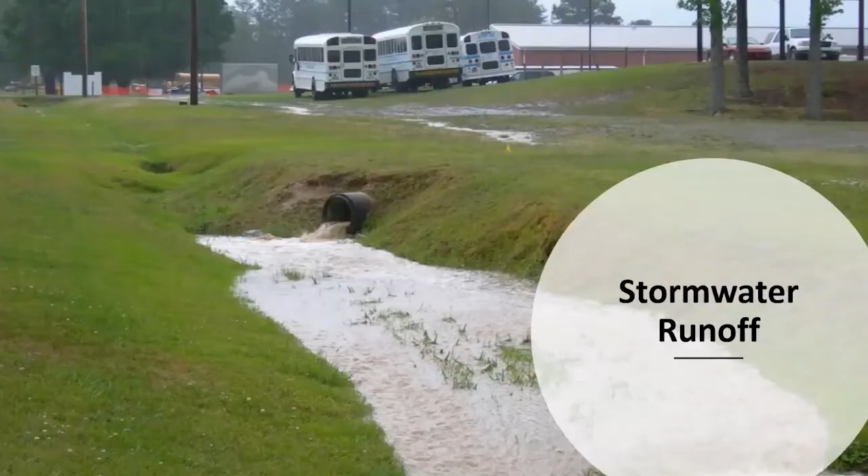So you're going to hear me mention the word stormwater runoff a lot, and I just want to make it clear what I'm talking about. This is runoff generated mostly from impervious surfaces. Those could be roofs or parking lots or roads, then running off and generally entering into a stormwater inlet or pipe, as you can see here.

And generally that water, by the time it gets into that pipe and into a creek, takes on this chocolate milk look, and a lot of times that's the sediment it's carrying. I want to emphasize that the more impervious cover in an area, the more stormwater runoff you'll have, and the more constituents are in that stormwater.

Conversely, when you compare that to an area that's highly developed with a lot more impervious cover, the amount of water infiltrating is greatly reduced and the runoff is greatly increased. That runoff is what contains this non-point source pollution like sediments, bacteria, and metals, which is the main concern.

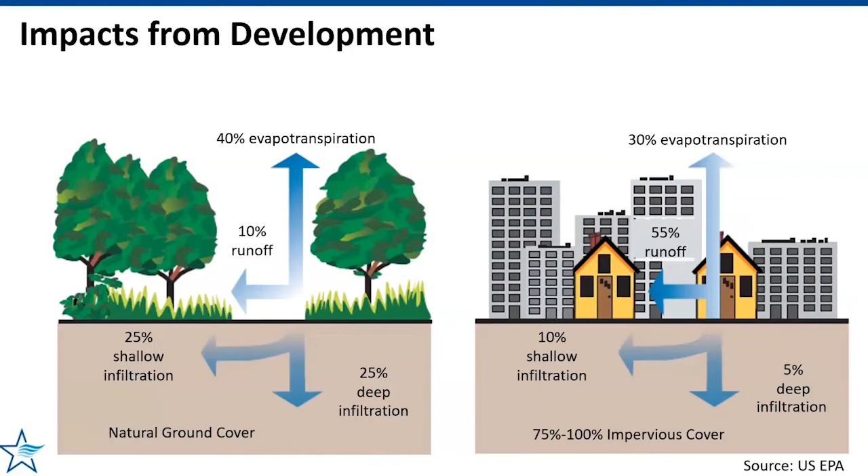We also have a huge impact of trash. The River Authority collects tons every year. This isn't so much an issue other than people causing it, but it's a large detriment to the river. Then we have pollutants such as metals, oils, and grease, often greatly attributed to the transportation systems of roads and highways, all entering into the river.

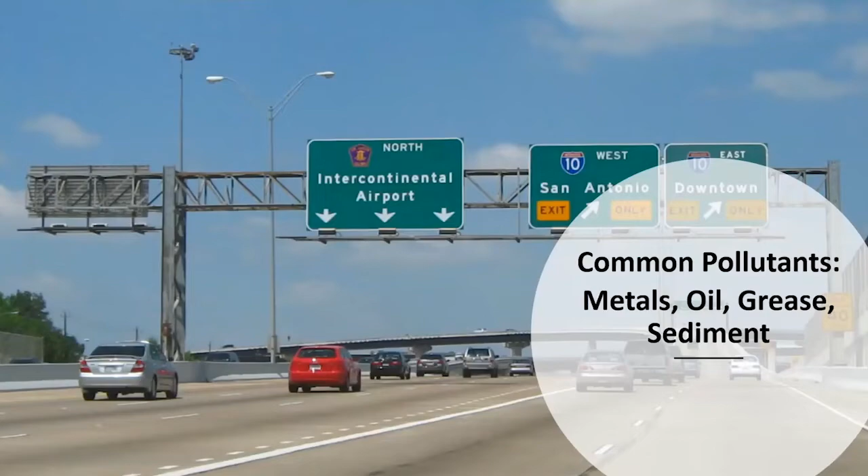And then sediment. Sediment is one of the largest problems here, and it comes from all sorts of different sources, from construction sites not having up protective fencing, to erosion, and on and on.

And then for us, bacteria. Bacteria is a very tricky constituent to treat, in that wherever there's human or animal activity, you're going to have bacteria, and it can grow exponentially. So even though you may treat a little bit, it can still grow exponentially once it reaches a water source. It's very difficult to treat, and it's the cause for most of the impairment for the segments in our watershed.

So I want to really cover what is low-impact development. When I talk about low-impact development, I'm talking about the overarching treatment of development - not just the actual methods, but the overall method of designing things. You're looking at the area holistically and saying, if I'm going to develop a greenfield site, I want to look at the slopes, and I want to protect certain areas.

I want to attempt to minimize the amount of impervious cover that I'm adding. All of these design principles are key to what low-impact development is. So low-impact development is not the actual method itself, it's this overall design philosophy.

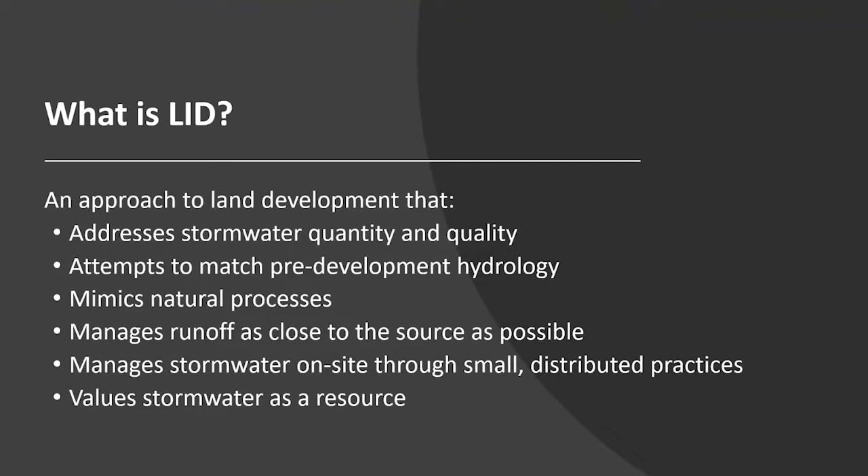It also mimics natural processes such as evapotranspiration and infiltration. One of the key concepts is treating the runoff as close to the source as possible, not letting it get into large volumes that are difficult to treat. All of those combine into having on-site, small distributed practices to do the treatment - overall treating stormwater as a resource instead of just stormwater that needs to be put into a pipe and sent to the nearest creek.

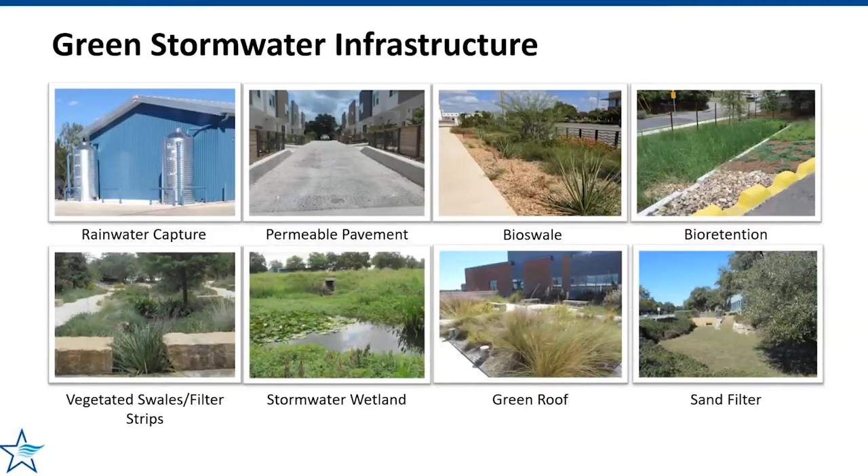Then we look at green stormwater infrastructure, which are the actual methods to implement the treatment. Our manual, which the city has adopted, has approximately 11 of these different methods. I'm showing 8 here, but in our experience, four of these really account for about 85 to 95% of the treatment that we do locally: rainwater capture, permeable pavement, bioswales, and bioretention.

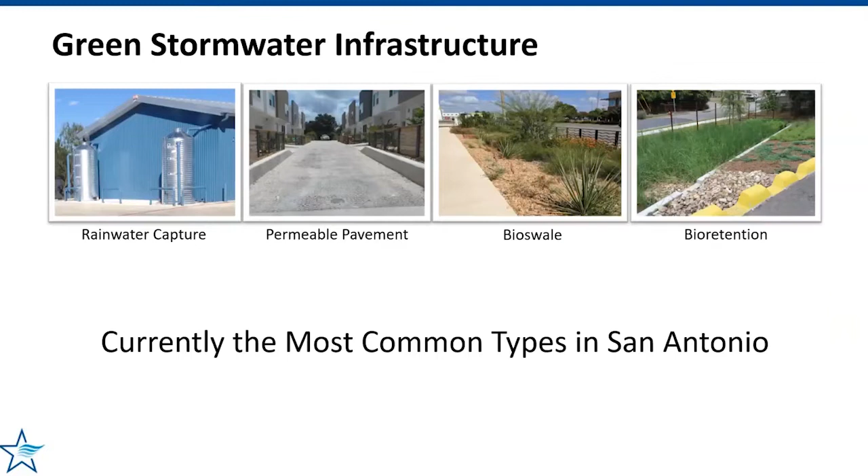Bioswales and bioretention are very similar to each other. The only difference is that bioswales are generally more longitudinal - they're longer and have a slight slope, so they can convey water a bit differently. You may also know bioswales or bioretention by the common term rain gardens. There's a slight distinction between the two in that bioretention generally uses a specialized soil, and oftentimes will have an underdrain - it's a more engineered and designed system.

Getting into a bit more detail on each of these, here's an example of rainwater capture using a cistern, capturing stormwater from a roof. I want to point out that for our purposes, we do not allow any type of potable water backup for cisterns, meaning these cisterns cannot be filled with common tap water for any reason.

One thing we've noticed is that oftentimes if these are filled with tap water, they never drain down. So one of the main ideas is that when a rain event happens, these should be empty.

We collect the stormwater after a rain event and then slowly drain it off over a 48-hour period. Oftentimes when they have a potable water backup system, that system fails and they end up being full all the time.

Here's an example of permeable pavement. The key concept here is that the top layer of pavers has space between each paver that stormwater can seep through and enter the layers below.

It often goes through a bedding layer, a sand filter layer, and enters a drainage layer of a lot of void space rock below, where it is held for a little while, and once it collects there, it can be carried off by the underdrain to a stormwater network.

These systems provide a lot of holding capacity, and research shows that not all the stormwater that enters through the top exits through the underdrain.

Some stormwater is held in areas such as capillary action and treated in the biofilms that form in that area.

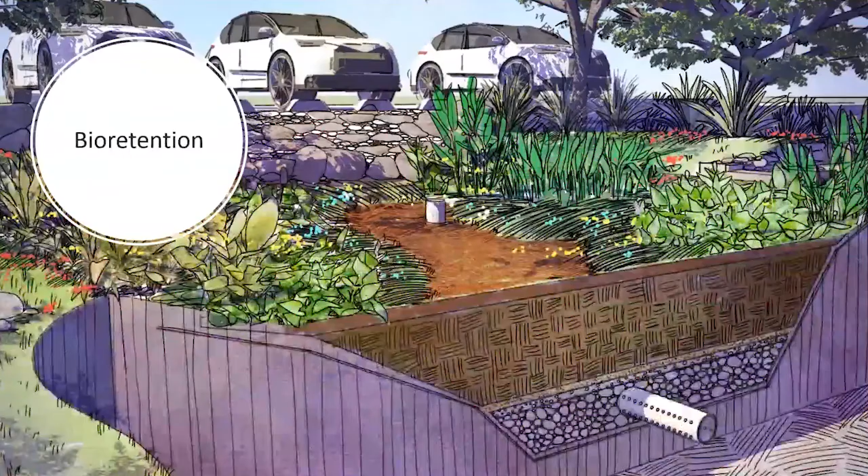Here's an example of bioretention. In this example, we show a parking lot in the background where stormwater is entering through curb cuts, through an erosion control area, and into this lower basin that is covered with mulch and plants.

Then it infiltrates through a special bioretention soil mix, through a choker layer, and into a rock drainage layer below, where it can be collected and put into an underdrain, which can then daylight to another part of the site, or connect to a stormwater network.

Oftentimes, bioretention areas may require liners, and those liners may cover the sides and bottom, depending on different characteristics.

For example, if you have a bioretention area near a building or hardscape within 10 feet, you will want to definitely have lateral liners. And if you're in an area where the soil below it does not infiltrate well, you may want to line the bottom, or if you're over a recharge zone, you may want to line the bottom.

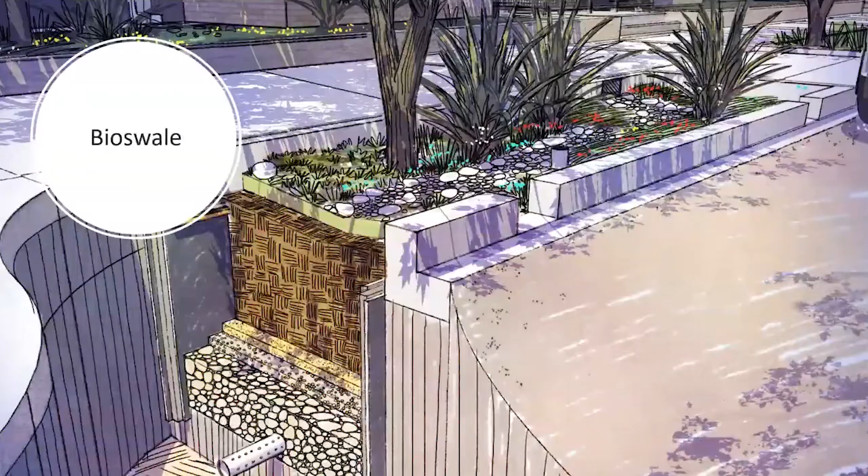The next example here is a bioswale, and this is a very distinct bioswale in a right-of-way, like right on the edge of a road, what some people would refer to as a parkway. So it's a very confined bioswale.

You can see the liner here on the sides. We show a PVC liner with geotextile on each side.

It has the same layers as bioretention, with a mulch layer on top, a bioretention soil layer, a choker layer, and a drainage layer below with an underdrain.

These are very adaptable systems, and this is in a very urban setting, but you can have bioswales in not so urban settings where they're not as constricted.

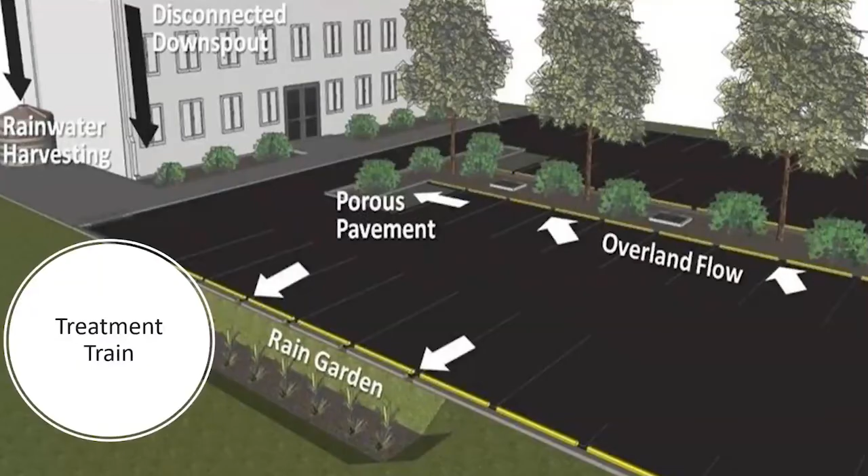I also want to introduce the concept of a treatment train, and really what we're showing here is different treatments on your site. For example, the roof in this example is being treated by rainwater harvesting, and some of it is going to a disconnected downspout to a planted area.

What I want to emphasize from what we've learned going through this process for the last 5 years is that it really requires a framework. And what I mean by a framework is it's not just that we have a design manual.

We also have city code that specifies that that manual is to be used.

The city code defines what low impact development is and the amount of treatment required to be called low impact development.

We also have city and county codes that require inspection after construction of these features and also annual inspections of these features.

So all these things together are what make a successful low impact development green stormwater infrastructure model work. Just having one or two is not enough.

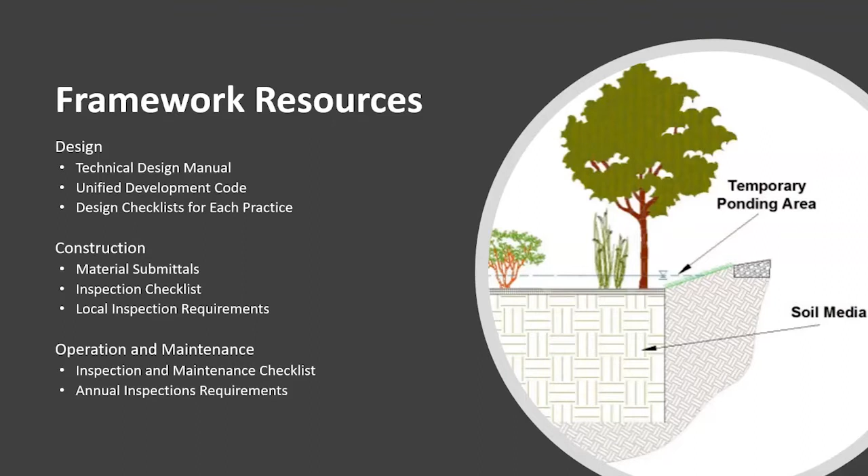You really have to have complete buy-in, from the definition and the code, to requirements by the city. And I'll get into these in a little bit more detail.

This is a picture of what our technical design manual looks like, and there's a link to it. It's published online as a PDF, and it really describes all the different methods of treatment.

It starts off from the beginning on how to do site analysis -- the full low impact development design process of evaluating your site, looking for areas that you might want to protect, and looking for areas that might infiltrate better based on soils.

And then it goes through and asks you, as the designer, what constituents are you most concerned about? Are you looking to treat bacteria?

If so, these are the recommended methods. And then you go on further through a design step-by-step for that method.

I would really encourage everyone to take a look at this manual. It is a very large manual and can be a little intimidating. Some portions of the appendix, where you go through the design iteration process, are some of the most informative portions of the manual.

Here's some examples of what's in the manual. This is an iterative design process for bioretention. It goes step by step on how to size it, and on different elements of the design you may want to include. There are also plans and sections in the manual as examples.

Later on, I'm also going to give you a link to LID resources, where we have sample construction documents for each of the methods.

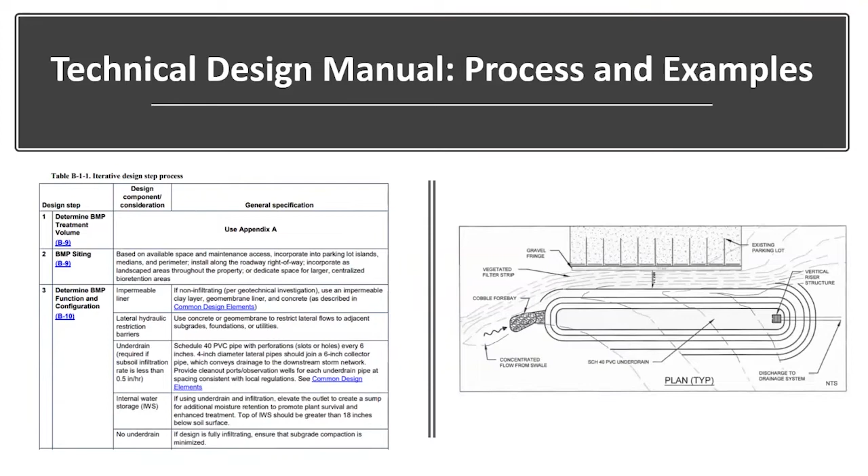The design manual also has specifications for materials. What we're showing on the left here is the specification for bioretention soil. It's important to have these specifications in your manual, maybe as a spec sheet, because this is what contractors need to obtain and test to make sure what they are building matches your specs.

We also have details for connections of liners and different material suppliers locally that you can obtain them from. The River Authority itself does not recommend any contractor or material supplier, but we do supply lists of people that we work with, without recommendations.

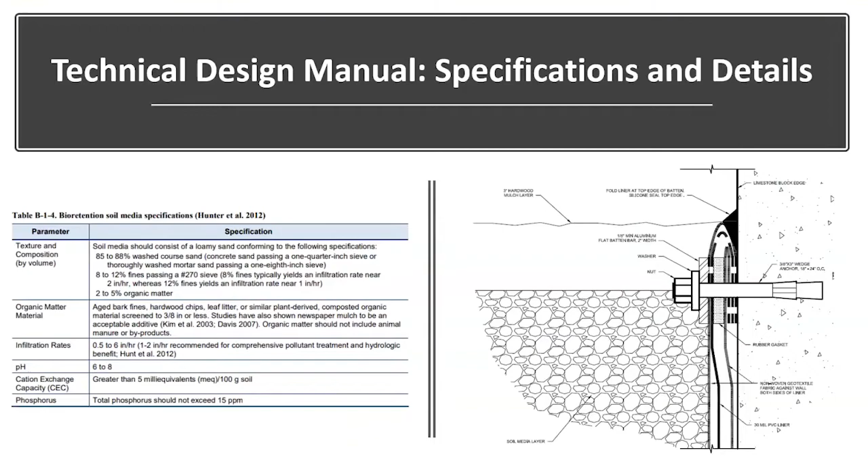Most importantly, I refer to the Unified Development Code. This is really the requirements for San Antonio that define what low impact development is. This portion of the code, with a link below, specifies the treatment quantity, the water quality volume. It defines what it is and states that it's based on the 90th percentile storm.

This is really looking at historic rainfall data for San Antonio using an EPA method. The 1.5-inch 24-hour storm is determined such that 90% of the volume that falls in San Antonio happens in 1.5-inch design storms or less. So if I can treat a 1.5-inch storm, I am treating 90% of the volume that falls every year, which is a strong thing to do.

This also shows that if you follow the standards in the manual, you are presumed to meet the following treatment levels: removal of 80% of the TSS and 60% of the bacterial load. Those are important because it's specifying the water quality volume as being treated and detained, but also specifying what's being removed.

There is an option in the code to use proprietary devices, and it goes on to state that those devices must meet the volume detention requirements and these removal requirements for volume.

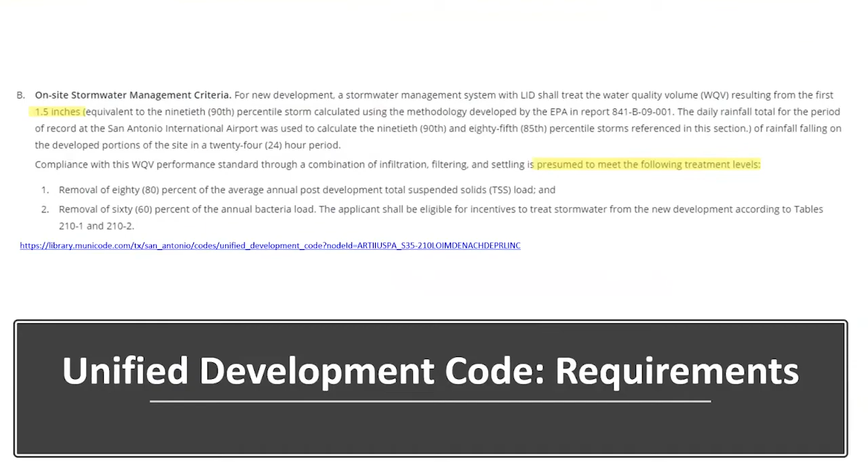Going through and doing evaluation of rebates—the reason we're doing rebates is that low impact development, or green stormwater infrastructure, is completely voluntary in San Antonio and Bexar County, except for a very small area right next to the river in a couple of the Rio districts. In all other areas it is completely voluntary, so the River Authority is trying to incentivize its use, and we go through and provide these rebates, but we get a lot of applications.

One thing I have is a checklist of all the information necessary on the plan set for me to evaluate a design. I provide this as a good example so I can compare design to design. This includes things like contours, catchment areas, soil groups, and BMP drawings, sketches, and sections, so I am clear the designer understands how they're calculating their treatment and what method they're using.

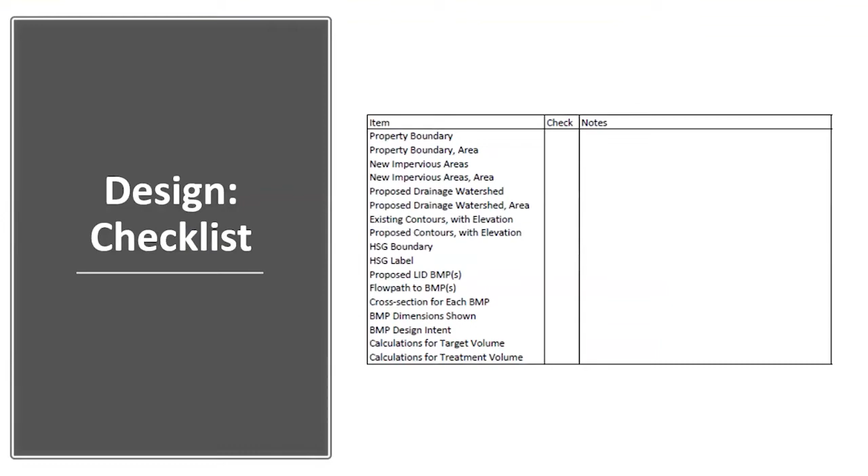We also want to make sure material submittals are carefully scrutinized. We have a requirement for the bioretention soil to submit test results at least a month ahead of time.

And then once the soil is delivered, we go in person and get a sample and have it tested. Too many times I have gone out and found soil that was delivered that I do not believe was the same soil that was initially submitted with test results.

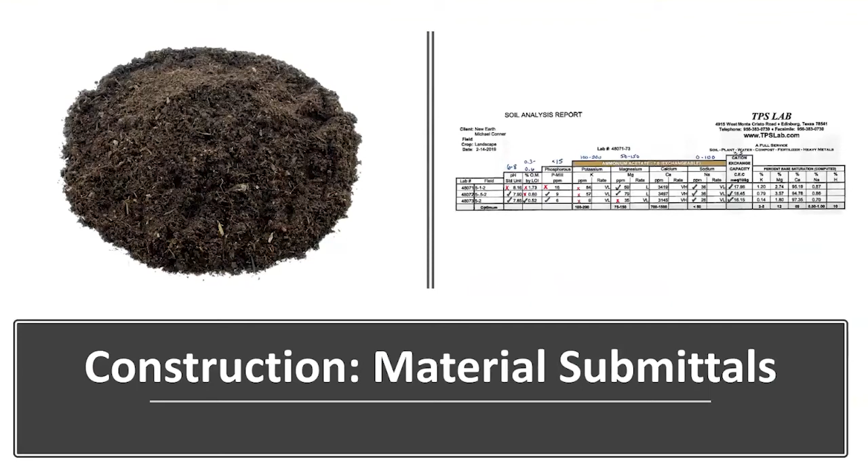What happens a lot of times is you may get a soil that doesn't meet the specifications, and it's difficult in some cases to meet the specifications for phosphorus. You end up having a bioretention area that, as water flows through it, is really leaching phosphorus instead of capturing and holding it. So it's actually doing more harm than good.

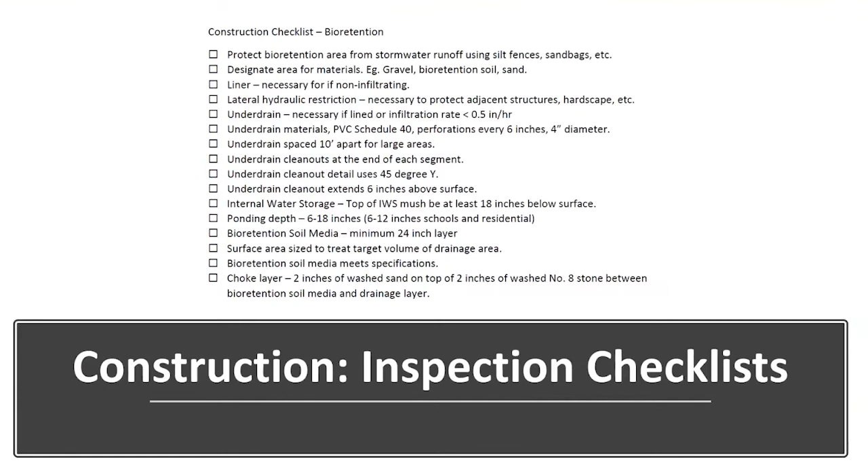We also have construction inspection checklists. As a BMP, a best management practice or method is being constructed, we go out and inspect at certain times. We want to see under drains, we want to see materials, check if materials are completely washed, make sure they have stormwater protection up during construction, and that they're building it correctly, not compacting the soil. It's very important to have these inspection checklists.

We've also learned that operation and maintenance is a very important part of low impact development, green stormwater infrastructure. These methods, once completed and in the cycle of being used, cannot be maintained by just a normal group with weed whackers and a blower. Oftentimes it takes special knowledge, and we do provide training to maintenance staff.

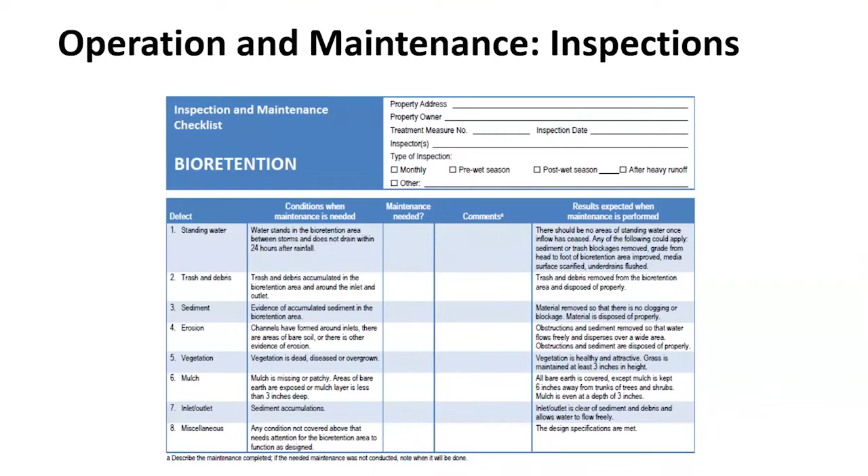Now I'm going to get into some specific examples from projects that are either rebate projects or projects built next to the river where we had a private contract with the developer to do stormwater treatment. None of these pictures are from school grants, but we also have a school grant program where we do smaller projects at schools.

This would have to be scraped off and dug down a little bit, with new mulch and possibly new soil brought in. Then we'd have to verify that it's infiltrating at the proper rate. This could have been easily addressed just by putting sandbags at the beginning of the curb cuts, or by covering the whole area with a geotextile until the rest of construction was complete.

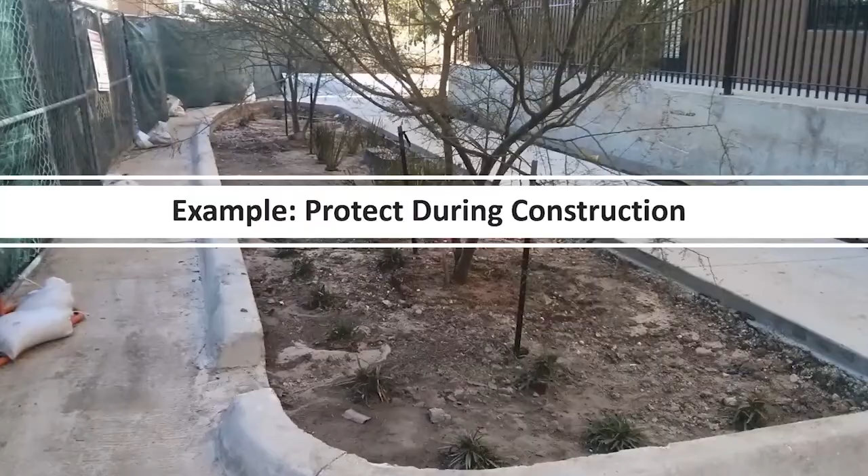Another important thing to look for are spot elevations in your design plans. It's very easy for people to assume that gutters are going to flow correctly, but we see examples here where we have a curb cut and the stormwater is entering this picture from behind me, intended to flow down here, enter the curb cut, and into the bioretention area.

This portion of the curb cut I often like to see sloped down with a 2-inch drop before it hits the erosion stones. But in this case, the actual flow line continues along the gutter and goes straight into a drain, so most of the stormwater bypasses the curb cut completely. I also want to point out in this bioretention area, I'd like to see a larger drop off here with more room for ponding.

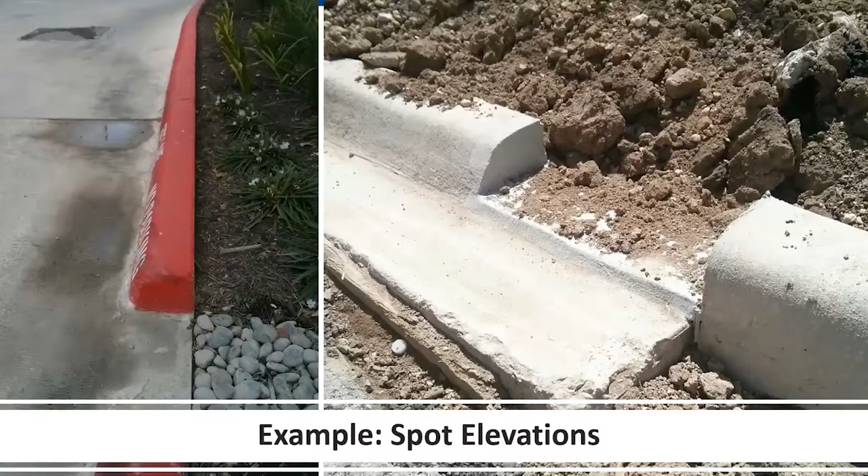When it comes to these features, the small details are very important. When the water does not enter the BMP or the feature correctly, it never gets treated. Other small details related to drains can also be affected here, and I'll show an example of that coming up.

So this is just one of the things we always look for, is to make sure that the basin is built correctly and the overflow drains are at the correct elevation. That volume that is stored above the overflow is volume that eventually infiltrates and is treated. So it's part of the calculated treatment volume, and without it, you're not getting the amount of treatment that is specified.

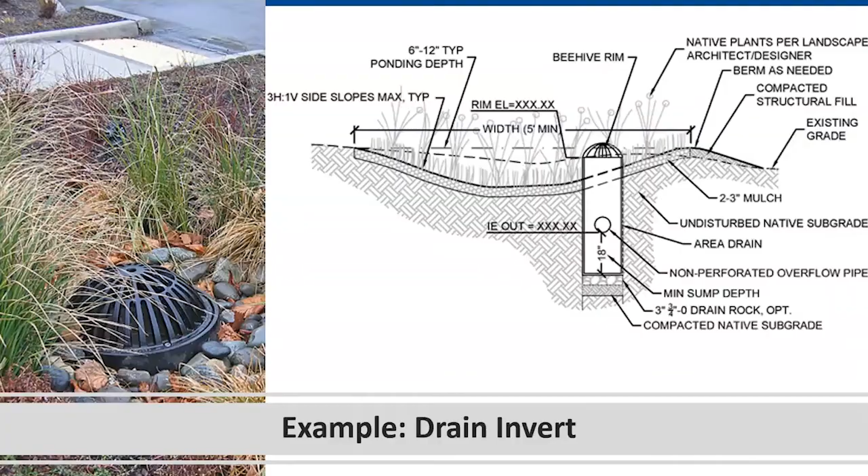Another good example that we see lacking a little bit is coordination. Generally, this is coordination between the landscape architect and the engineer. Oftentimes, the landscape architect's plans do not incorporate drainage portions from the civil engineer's plans, and vice versa. The civil engineer's plans don't include landscape amenities.

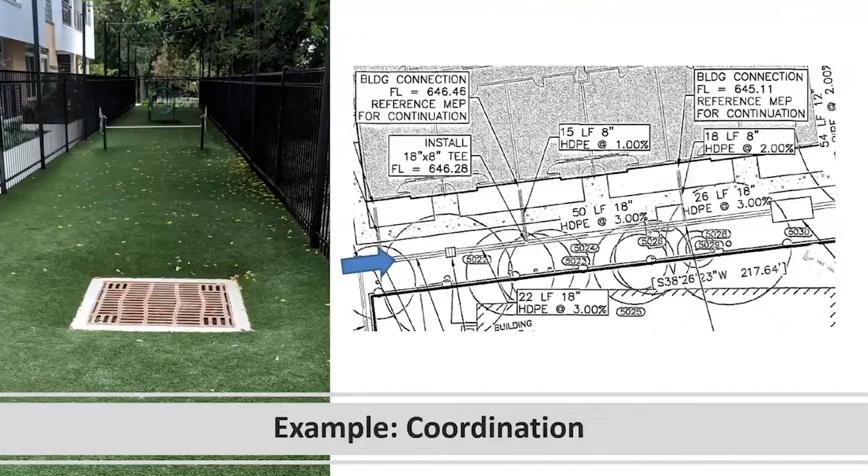In this example, this is another apartment building right next to the river, and when we reviewed the plans, on the landscape plan, we saw a dog park, but we did not see a drainage system in the middle of the dog park. And on the civil plans, we saw the drain, but we did not see a dog park around it. So when it was reviewed, it was not caught until they actually built it. Right in the middle of the dog park is a drain inlet that drains right to the river. We have since then gone back in and required the builder to install an inline filter to handle this. But coordination is the main reason why this happened, or lack of coordination.

Also, excavation is an important point to look at. It's very easy on these design drawings to draw a vertical wall to be excavated and filled back in with drainage layers and soil layers. In real life, it's a little bit more difficult to construct and dig that vertical wall. We oftentimes will recommend that maybe they lay back the excavation a little bit at a slope because it's easier to dig that way, and then build it back maybe with a vertical wall.

At least what I always recommend is to have all the materials on site before you start digging, so that as soon as you dig the trench to the proper depth, you can start building back the layers the same day. In examples where this didn't happen, the contractor digs one day, may decide that he's not going to work on the trench for another week, and inevitably it rains during that time. And it's not just a regular 1-inch rain, it's a 5-inch rain, and the whole walls collapse in, and they end up having to go back and dig it back out. This happened on this project.

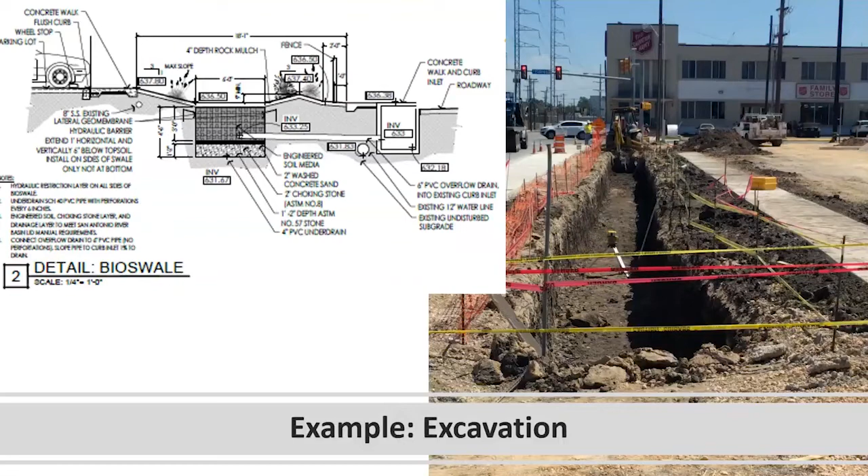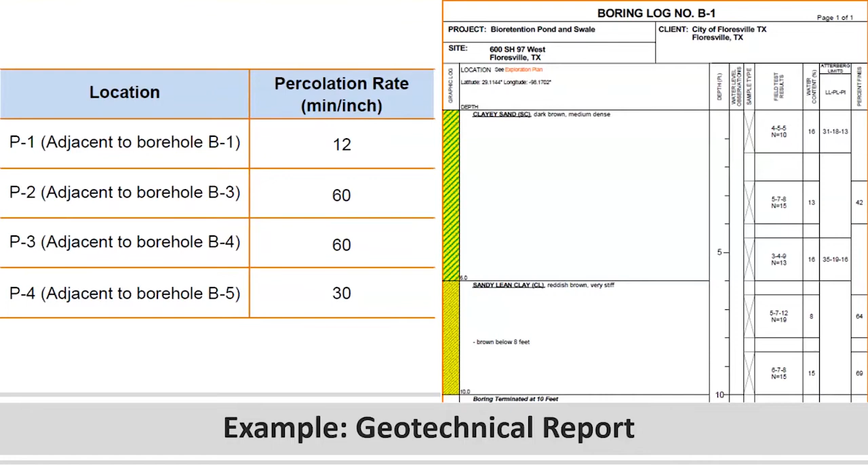It's also very important, if you are planning to do infiltration into the in-situ soils that are there already, that you perform a geotechnical evaluation of the area with borings and infiltration rates. The number one failure for bioretention is not draining correctly. In areas where you have good infiltration rates, it is not required to have an underdrain, but you do need to verify that and have a safety factor. We always have the boring to at least the bottom depth of the design.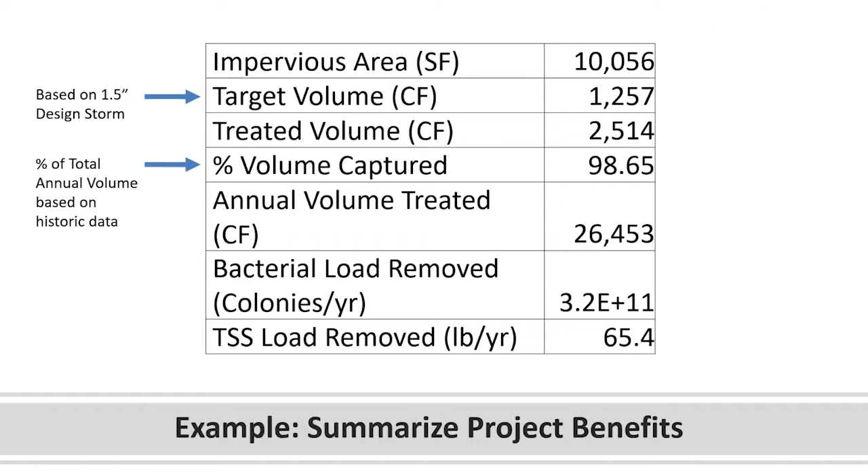We put a heavy emphasis on training and education. We have partnered with the county and the city to have a credential program that provides credentials for people to perform construction inspections or annual inspection and maintenance inspections who do not have another type of degree, such as a landscape architecture license or a civil engineering license. We provide that training, register and certify people, and keep track of that, making sure people come back every 2 years to recertify. We also have a comprehensive design class where we go through site planning and design and cover as many of the methods as possible. We also can tailor training; for example, we'll help the city train maintenance staff, and we can conduct tours as needed.

Now we'll jump into some of the real-world examples. This is a permeable pavement installation in Leon Valley. One of the important things I want to point out about permeable pavement is that it treats the water that falls on it and an equal area that can flow to it, but it's limited to basically that treatment area.

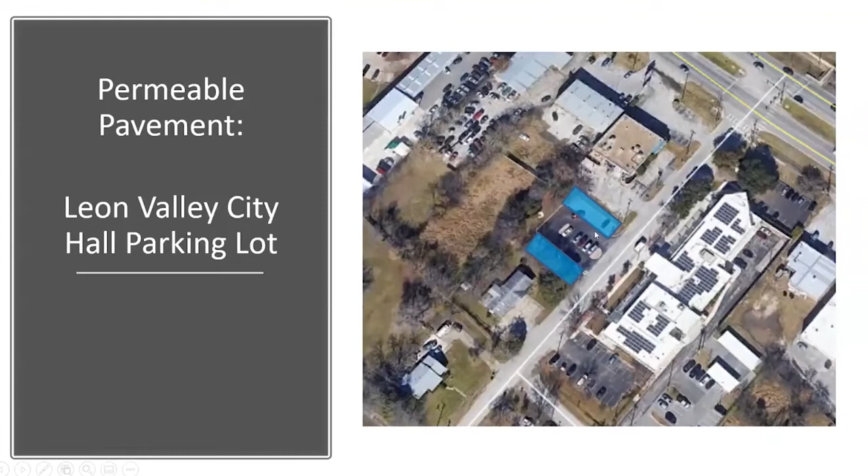You don't want to have a large catchment area flowing to the permeable area, because that tends to clog them. So in this example, half of this parking lot, which is regular asphalt, flows onto the permeable area, and the other half flows over here.

Another example, which we saw a little bit earlier in the trenching examples: this is the City of San Antonio Development Services Department parking lot. The Development Services building is located right here, and right across the street is a relatively new parking lot.

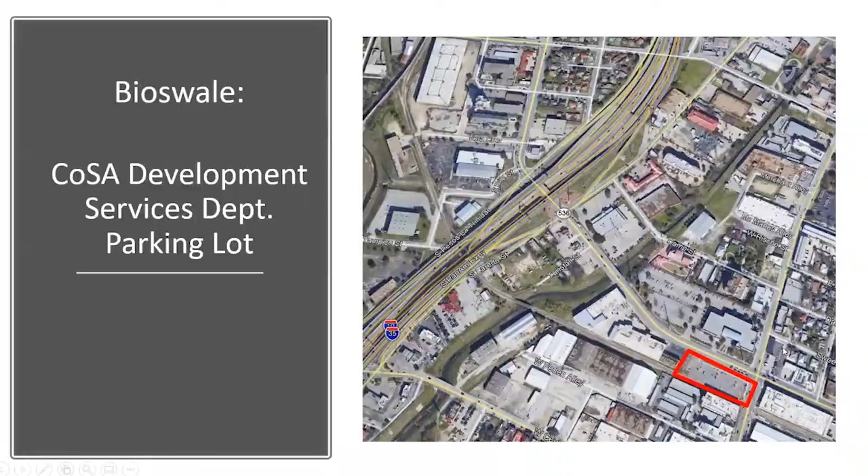This whole parking lot has about 95% of its runoff directed to a bioswale. The bioswale is about 250 feet in length, and the complete width is about 16 feet, with the bioswale portion right in the middle, about 8 feet wide. This end and this end are higher and flow towards the center, and there's an underdrain that connects about right here to an inlet on the street to carry away the treated stormwater.

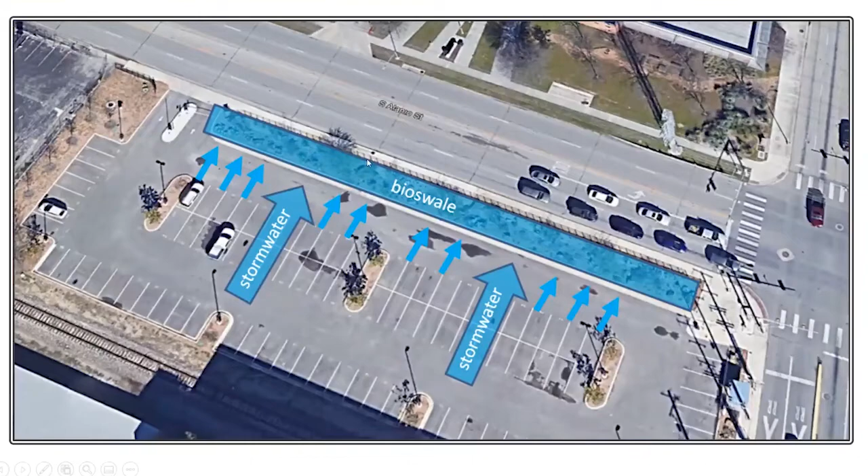Some of the nice parts of this project are that it uses rock mulch, and the maintenance is fairly low. We do get some weeds through there, and some of the native plants that are planted there are spreading out and growing in unintended places, so there is a little bit of maintenance trimming those back. But all in all, a very successful project.

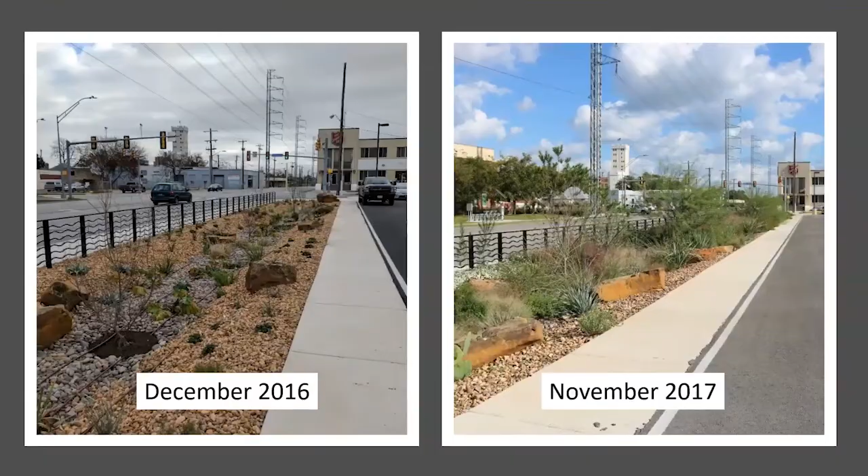Another one is the expansion parking lot at the museum, our local children's museum. This was built as an expansion after the museum became so popular they needed another area for parking. This area was added, and it basically treats all the stormwater that falls in the parking areas in two bioretention areas.

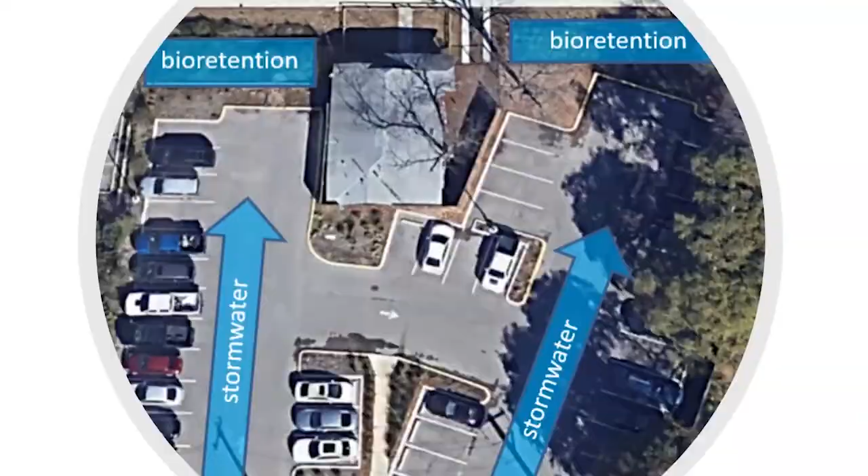These are square basins, and a good example, as you can see, with curb cuts up here where the stormwater flows down, good erosion control on the slope as the water enters the basin, and a nice high ponding depth—you can see the control on that is about 12 inches all around. The water then spreads out over that whole area and infiltrates down.

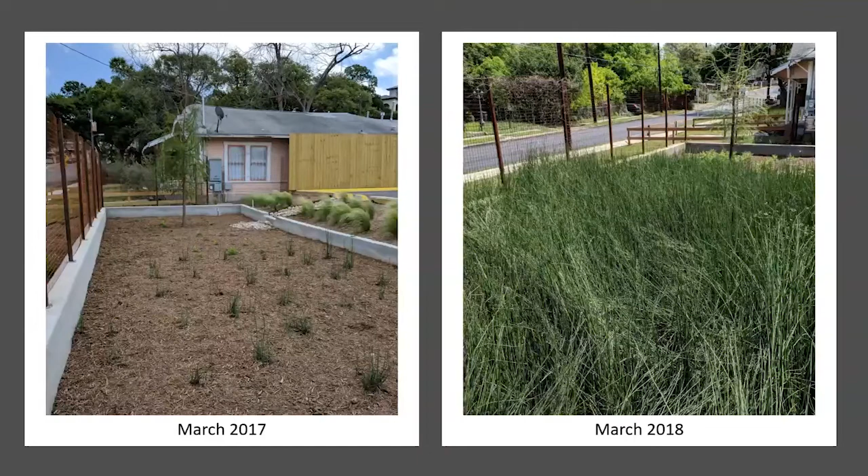Successfully, you can see it's planted with horsetail, and just a year later, how much growth has gone through. This may get some irrigation, but most of that is from stormwater.

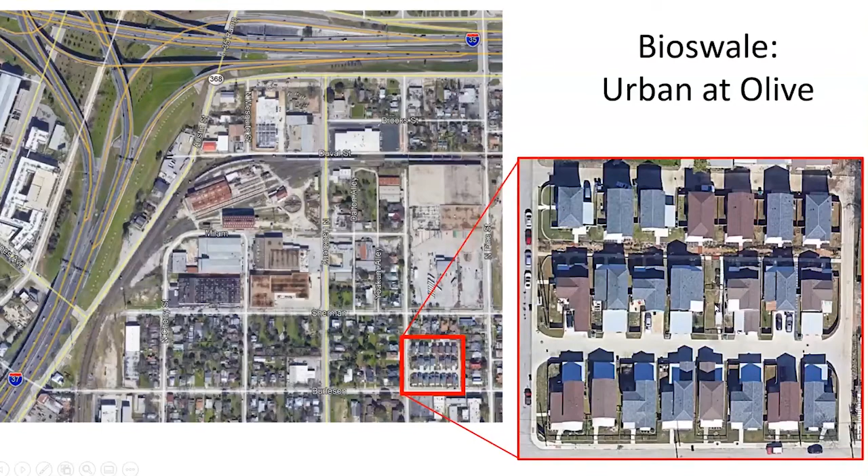The way the slopes work on this project, most of the stormwater falling on these roofs and in this alley flows to this central park area, and then down a bioswale through the development. In this picture, you can see the alley up above and how the stormwater flows through and enters the bioswale.

This is just the beginning—it turns around a corner and flows down the street. Remember, this bioswale is infiltrating the water as it flows through it, so you probably will not see a lot of surface flow except in very large events.

Here's a picture from the street. That stormwater was up here and continues down the street here. It does have an underdrain, and that underdrain daylights down the street a little bit down the way.

A real interesting story about this project is that the developer ended up building this row of houses first, then finished the bioswale, and started construction on this last row. That last row sold out so quickly, and most of the people attribute it to the beauty of the bioswale and how this area looked as they were walking through. We heard that from the developer, so we're very pleased to hear that.

Here's another example, MP Studio, which shows a treatment train demonstrating multiple treatments—going from one treatment to another, basically from cistern to bioswale.

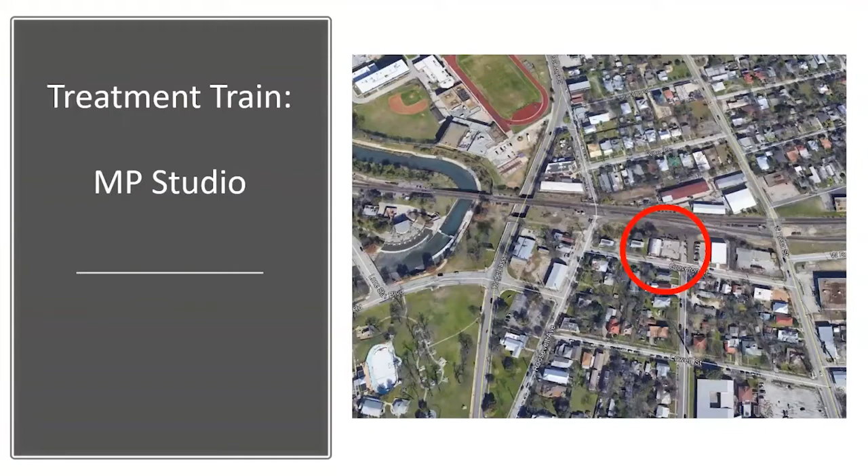MP Studio is a local landscape architecture firm, and they have retrofitted a Quonset hut. On both sides, they have a gutter where they collect all the roof runoff into a cistern. There's one on this side and one on the other side.

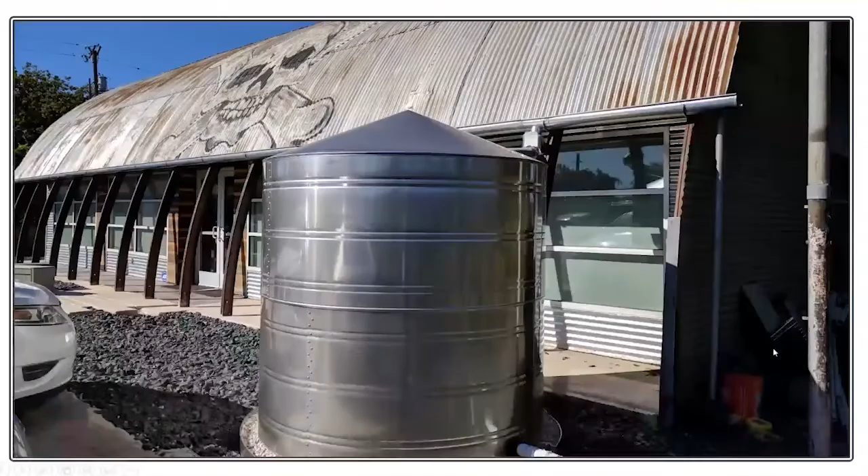This cistern then slowly drains, as I mentioned before, over 48 hours, to a bioswale located right down here that looks like this. That bioswale flows out and around the corner where it daylights on the street. It also collects all the runoff from this parking lot, and it's a good example.

During construction, you can see the liner on the sides, because you don't want to be infiltrating stormwater right next to a parking lot. This liner keeps that stormwater controlled. You can see the underdrain with a clean out, and that goes all the way around the corner.

This is also a good example of a bioswale that is not planted at all. From the surface, they wanted it to have a modern look, so they used just a basalt rock. You really can't even tell how it functions unless you knew.

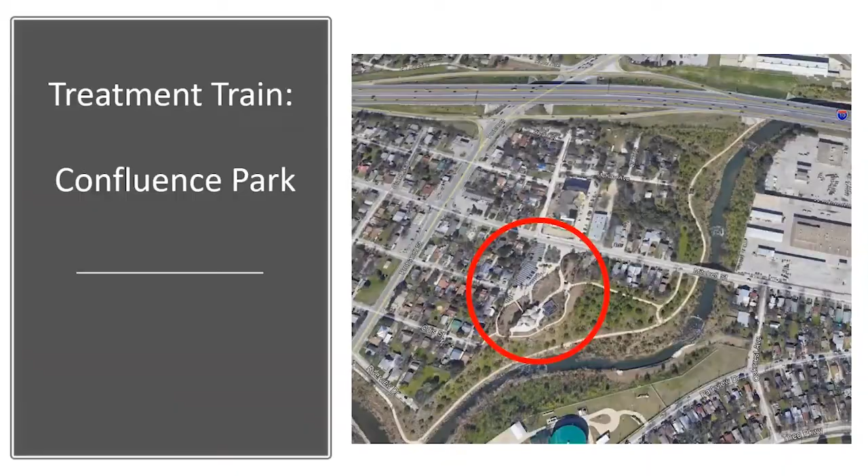I think maybe our final example is Confluence Park, a new park here in San Antonio near the confluence of the San Antonio River and San Pedro Creek. Many partners took part in developing this, and I really want to show the treatment train here.

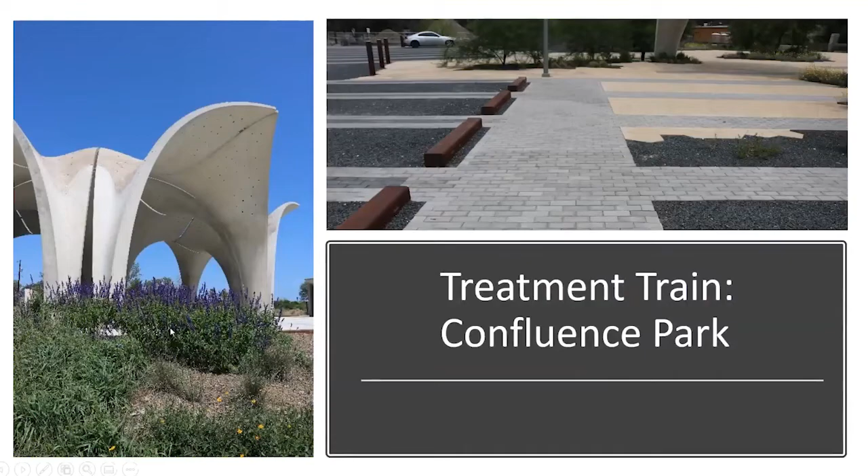All of the stormwater that falls on impervious surfaces in this project stays on site and is treated. There is permeable pavement in the parking lot, in the shape of these basalt rock parking areas with drainage below, and all the stormwater that falls on petals like this is collected in drains, and all of that runoff is directed to a central water catchment system located underground.

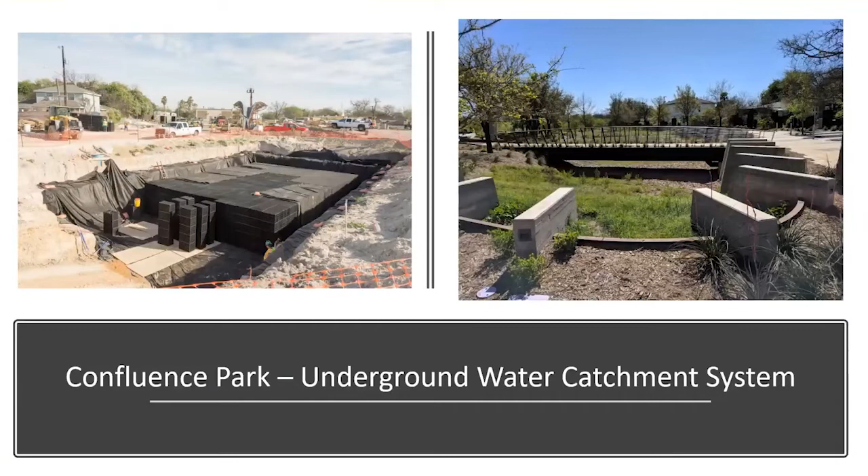They do use some of this water to irrigate the whole park. It's a very good example, and I recommend a visit there next time you're in San Antonio. That pretty much concludes my presentation.